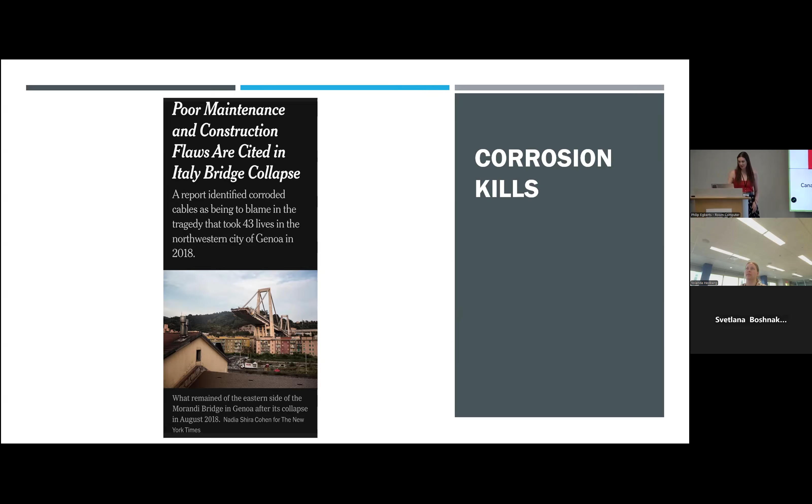So we know that there's a direct link between corrosion and safety, as so many of you have already pointed out this morning. We also know it costs a lot of money. This was also raised as well. And I really like the perspective you brought, where if we can save money from doing it properly, we can put that money elsewhere. So from a company perspective, an organization perspective, a government perspective, that's very helpful, actually. Maybe we could be putting it into healthcare or something.

Yeah, there's a cost to it, but it's also depreciating all the assets that you have. It does, yeah, exactly. And I think as well, we can get a pretty good handle on what the direct costs are, and in fact if you look in the impact study, it will talk about that. But there are also indirect costs associated with corrosion, which we found very difficult to measure, that are often at least an order of magnitude - the same order of magnitude as direct costs.

So direct costs are things like your materials or your replacement costs or something like that. The indirect costs are more - have you got environmental fines? Have you lost production? You just told us about an incident that shut everything down for 2 weeks. In mining, if you have a shutdown for 2 weeks, someone's getting fired somewhere. That's all I know.

So that's important. And then, of course, we've heard a lot of this as well across the group. We know corrosion pollutes. We've got pitting corrosion as a leading cause of pipeline leaks - so many examples of this. We recently had a client, a gold mine. They were using cyanide in their process, and there was a leak in the cyanide circuit. So immediately there's remediation, there's a lot of stuff that has to happen. They did a very good job of it, but it shouldn't have happened in the first place.

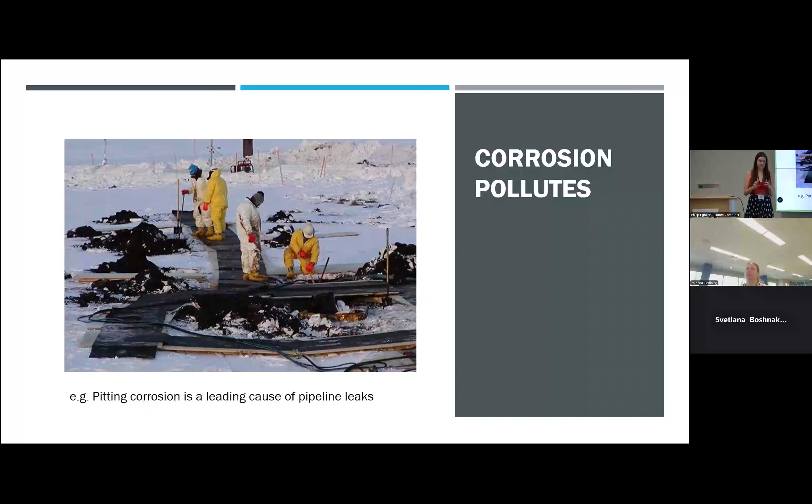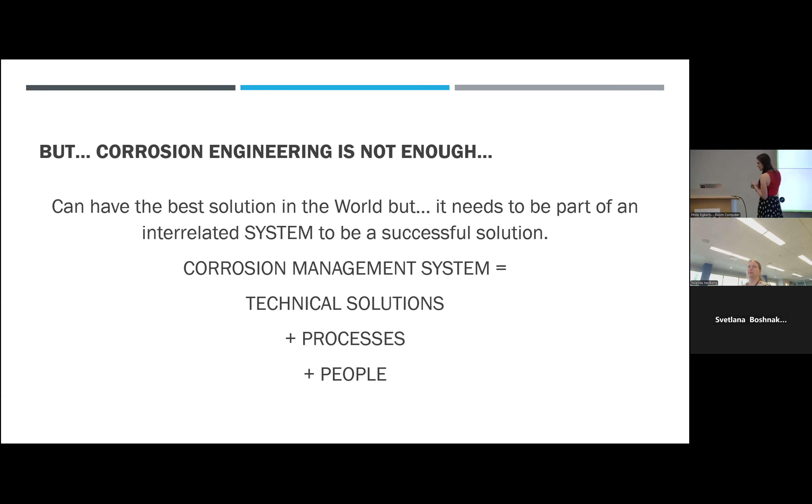So I think we all have a good understanding of why corrosion is important, but you're all in this course, studying away, and really focusing. I found I really focused when I was in school on the technical solutions - what are the right technical solutions? But it isn't enough to show up and solve the problem of corrosion with good technical solutions. We need to actually create corrosion risk management systems. The system is a combination of very good technical solutions, plus processes, plus people. So we're going to spend the rest of the day looking at some of these.

But just to drive it home a little bit, it's just a made-up example, but it was really just to show - imagine that you're on a project. Your client is in Indonesia, a big mine site in Indonesia. I have one in mind, but I won't say names.

They're having rapid deterioration of their coating on structural steel. You're going to come in and say, I have a great solution, I'm going to give you this specification for this amazing coating that will do all of these amazing things, it's going to be great. But the site team doesn't really have the skill set required for implementation of this specialized system. They don't really have a robust quality assurance, quality control process. What would happen if we only focus on just giving them the right solution?

Because they can't do it, right? So sometimes we have to always pay attention to what is the situation that we are putting this solution into. Do they have the processes? Do they have the training? Do they have the budget? All these different things are working together to make sure that we get the technical solution right.

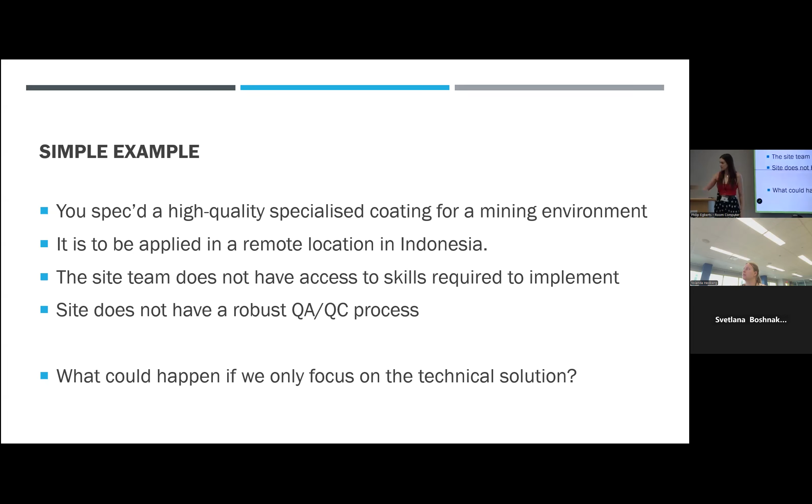If we just went in at the moment, and this is an actual client that we have right now, and say you should be using this coating, get it done, this is kind of what we would end up getting back. It would be comments around, oh, you over-engineered this. We can't even source this. There's something wrong with the system because we put it on and now it's falling off. It's the vendor problem, it's the manufacturer problem.

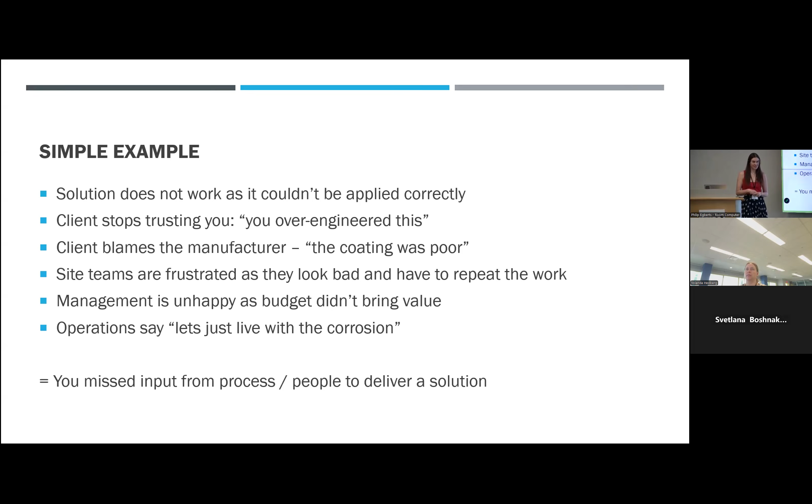We didn't get any value out of this. And then often you get people just giving up, right? So we've kind of missed really important input from a design perspective, from the process and the people side of things. We might have the best solution technically speaking, but if we can't implement it and get it to work because we've missed out this other information, there's no point doing it. We'd be better going with a bog standard epoxy and calling it a day. So we have to think about process and we have to think about people.

So we're going to kind of walk through this a little bit today. I'm not going to go into the corrosion engineering and the technical piece because you guys are already doing that. But we're going to start with how do we use this data in the best way to start making decisions. So we're going to look at corrosion risk assessment. Then we're going to get into, well, what are the processes and what's the structure and the framework that we should be using in order to create a corrosion risk management program. And then we're going to get into the human factors aspects.

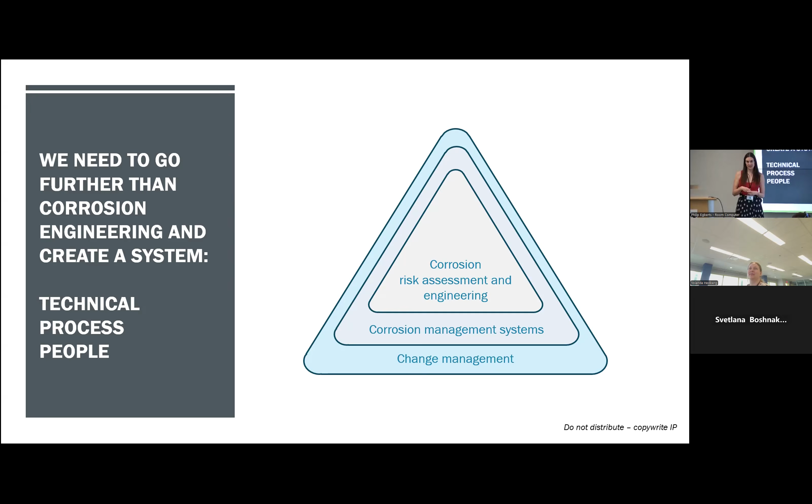I'm not a change management expert. I haven't done any training in change management. We've been working with professionals in this area for years, so I'm just going to share with you what I know. I just want you to understand I don't know everything. But if it's something that interests you, this is an area where I'm really focusing my learning right now, so if it does spark your interest, I have loads of references for you as well. So corrosion risk assessment - does anyone in the room have experience using a risk assessment approach?

Yeah? I read your book that you told me to read. You read the book? The expensive one, it was like $300. Yeah, that's excellent, so Phil's good. And you've had some experience as well? We'd have a lot of things rusting all over. Okay good, so this table's going to have a little head start maybe on other people. Anyone else? Mayday, you've used it as well, you've used it with us. That's good, she's already ahead. That's good, okay.

A risk assessment really is just another tool for you to help you with decision making. It's a very structured approach to looking at all of the risks. Yolanda will like this, you make risk registers. You really think about what are the defects that could occur and how you're going to control them, and assigning a numerical value to those risks so that you can prioritize and go through them in a systematic manner.

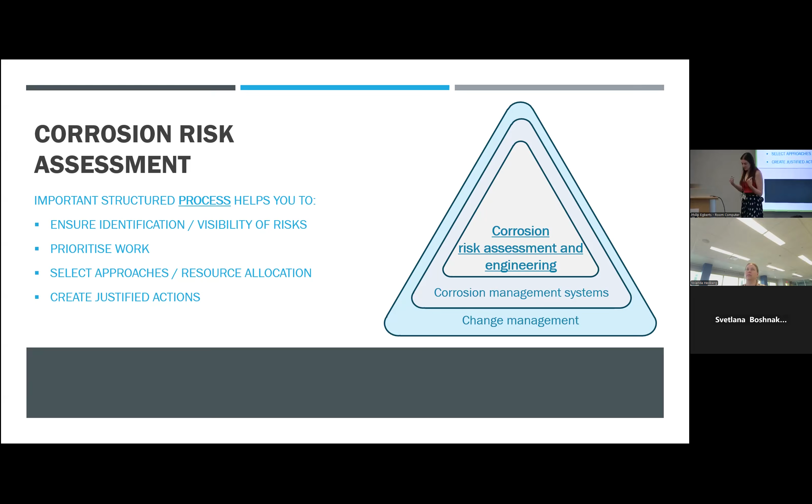So we use this as well to answer the question of what is the most important thing that we could be doing here with the resources that we have, whether those resources are people or budget - obviously a big one. But we need to be able to justify as corrosion engineers why we're recommending what we are recommending. So you could do everything, right? But we can't do that, it's not practical. So we have to focus ourselves and our resources, and this is a tool that helps us to do that.

So for those of you who've used these before, this is going to be very simple. We're just going to go through it at a very high level today. But risk is really just probability multiplied by consequence, right? So the likelihood of this defect occurring and what could happen, what's the impact of this if it fails in this way. So very, very simple.

So the probability is what's the rate of probability of an accident happening, on a scale of say 1 to 5, 1 being highly unlikely, 5 being almost certain. If it's me driving, probably not 1, slightly higher, but let's say 3 - there's a moderate chance of this occurring.

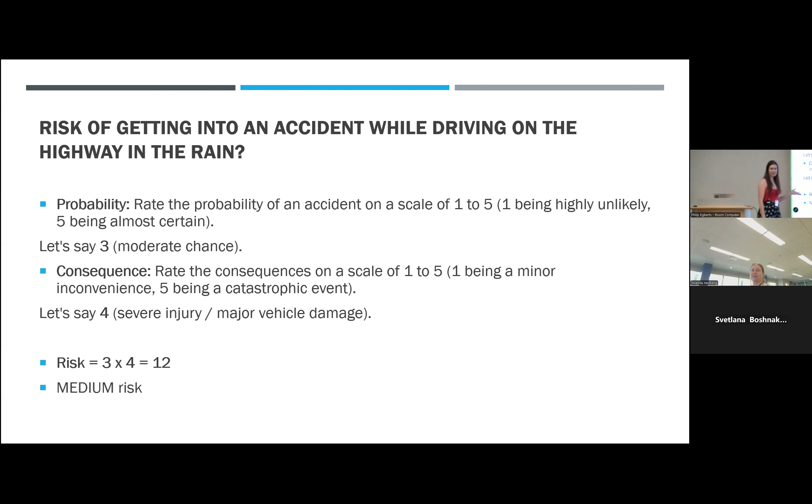So let's say we choose 4. It's very, very simple. So then you end up with the risk calculation being 3 times 4, which everyone could do. We're at a risk level of 12, which if you look at our matrix, we're sitting over here.

So often there needs to be a decision point when you're doing these risk assessments around what is the risk level that you can tolerate. In this case, we're talking about what's the risk that I can tolerate as the driver of that car.

Am I going to bother doing anything with this risk because it's here? Or is it only when it gets into this kind of red zone that I'm going to start really worrying about it? Organizations have formal risk sort of approaches that they use, and they will have their own tolerances.

So say this was a bridge - let's go back to our bridge example. We may have a client that says, okay, our risk tolerance is anything that's in the high zone must be addressed, this is non-negotiable. We're also going to add in anything in the medium risk sector that's 12 and above.

So you're starting to narrow down where your focus needs to be. You've got all of these defects in your bridge, you've assessed them all, and now you know which ones you're going to focus on because they're either high or medium high. Those are the ones that are going to get resourced because they're the most important ones that we need to do something about.

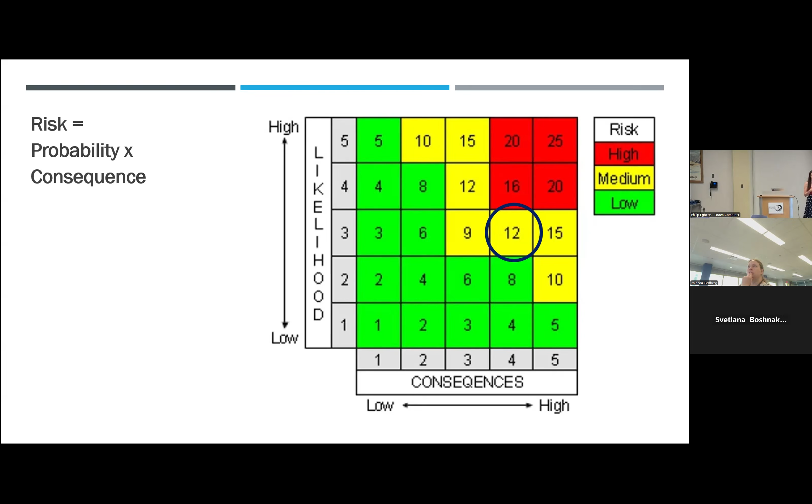And then maybe you're saying, okay, the ones that are 12 or 9 to 11, those are the risks that we are going to monitor more closely because they're a little bit on the cusp of our tolerance level. And the low ones, we're just going to routinely monitor. So you're starting to use your assessment to drive very targeted, focused actions - that's really the usefulness of this tool.

So the other nice thing about it, and Yolanda's going to be like, yes, is it forces you to actually sit down and think about what are all the possible things that could go hideously wrong here. What are the risks? What are the defects that could occur?

So if we go back to our bridge again, you are going to go through that bridge at a component level. So you might look at the deck, you might look at the abutment, whatever the major components are in that bridge, and you're going to say, what are all the things that could possibly go wrong? So you're thinking about de-icing salt attack, spalling, things falling off, cracking, loss of rebar section, potholes.

You're going to go through the entire list for every component in that asset, and you're going to assign each item a risk value, because then you can go, okay, we've done it for the whole bridge. We only have $2 million, so we're going to figure out those high risk actions and start to lower the risk profile of that asset.

So if we go back to our driving in the rain example, actually, maybe we won't do that right now. We'll do that in a minute.

The first thing is that it forces us to go through and really do an assessment on what are the risks that we're seeing here as corrosion engineers. Sometimes you're going to have to bring in our friends from other disciplines, which is where we get to make lots of friends. In this case, we'd bring in a structural engineer to look at our bridge. They're going to input structural risks that they're seeing. So it's a multidisciplinary approach.

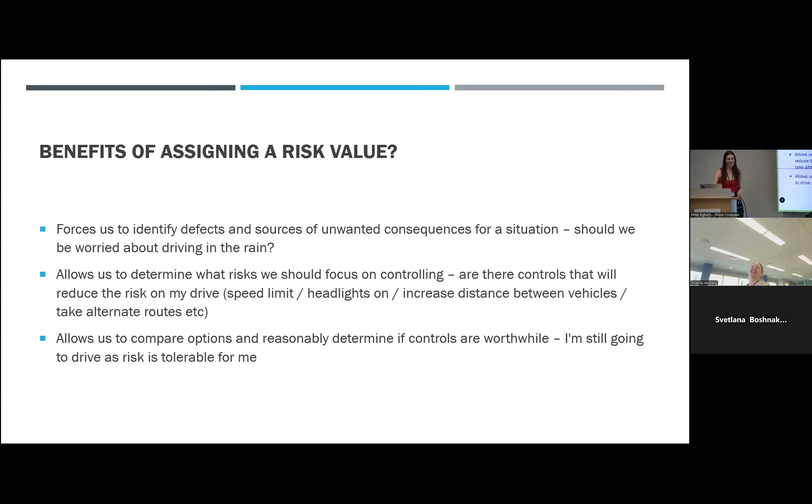What's that? Christmas lights all around the car. I'll put Christmas lights. Yeah, exactly.

So we've been through a very simple example with the car driving, but in reality these matrices - normally what happens is a corporation or organization will develop what risk means to them, and they'll create their own probability matrices. These are just some examples. I can't exactly remember where I pulled these from, but some people will look at likelihood 1, 2, 3, 4, 5 - saying the likelihood of this happening is rare to almost certain. The language changes, but the structure is usually very similar.

Or here's another one: it's going to happen at a frequency of less than 1 in 1,000 years. Seems quite low, right? So they've said improbable. And then all the way down to frequently, something that might occur once a year. So the probability matrix has to actually make sense from the perspective of what's happening at the asset level. Like if we're looking at assessing corrosion, this doesn't really make a lot of sense. So we have to be careful that the matrices we're using actually make sense and are at a granularity that's going to be useful for us.

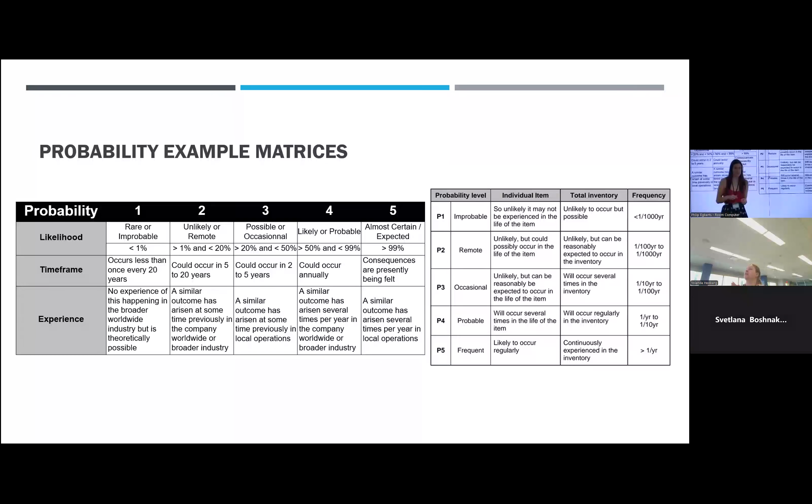Yeah, sector, because I can think - yeah, exactly. So you may have your stress corrosion crack growing at very small levels over 50 years. You still don't want that crack, right? That's still a massive risk for nuclear, but a crack like that in another piece of process equipment in mining, or for example in a replaceable pump, you don't care. So this is what I mean - you have to be a little bit careful with the way you assign probability. It has to make sense for what the context is.

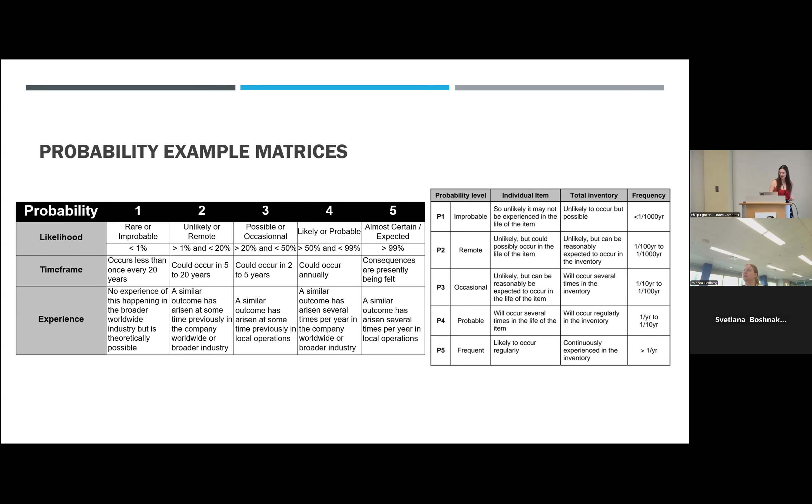But there are loads of these, and you can look at them and do some searching and you'll find lots. Consequence matrices - same warning.

The level of consequence has to match what we're doing in the context. They typically will look at health and safety, environment, and operation. Operation typically tends to link into finances in some way. So normally the organization will have its standard consequence matrix. Often they have it at a corporate level, and you have to bring it down and adjust it to the levels we need for corrosion.

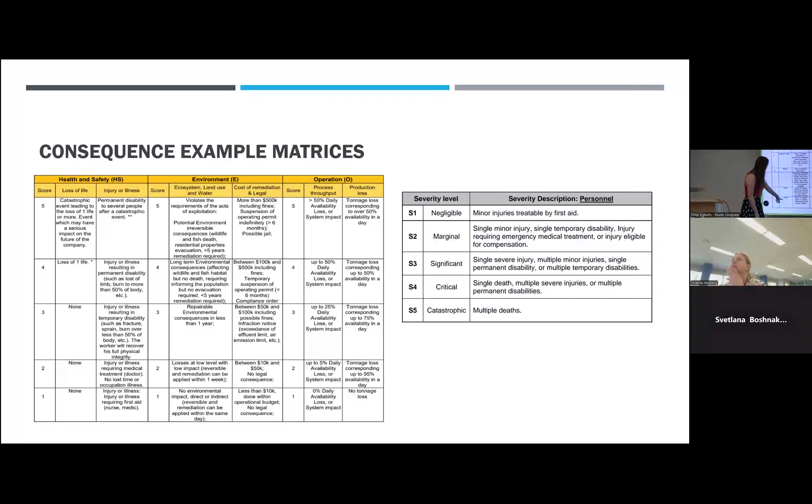Here we can see we're going the other way now. Down here, there's no health and safety consequence of this action happening, so we're going to assign it a 1. However, we've got a 5, which is a catastrophic event leading to the loss of a life or more. So you're sort of having to assess things on this scale.

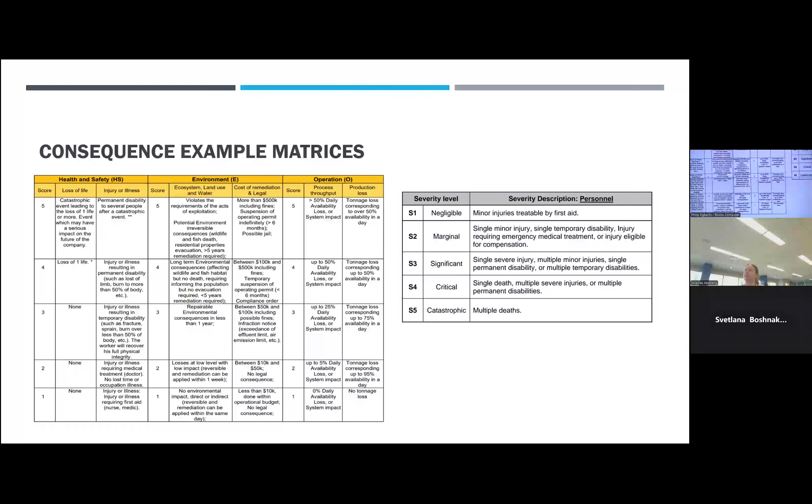Here's another one, they've called it personnel, but it's really health and safety again, similar kind of scale. So these matrices usually come from the organization. Normally when we say, hey, we need your risk matrices, I'd say 95% of companies already have something they're using at the corporate level. As corrosion engineers, we take those and ask, does this make sense? Are these levels correct for the context we need to use? If they're not, we have to make adjustments. But it's at least a starting point.

So when we think about doing a corrosion risk assessment, yes, we've just jumped in and started talking about assigning probability and consequence ratings, but there's actually a process involved that gives you the whole stream of how we approach this when we get into doing these for an asset.

First of all, we're selecting what is going into this risk assessment. Not everything needs to go into a risk assessment, not everything is really that important. Do we need to look at this tiny valve on that pipe that doesn't matter? No, it's not a good use of our time. However, do we want to look at the deck of this bridge? Yeah, probably—we've decided it's critical.

And there are ways to formally do that criticality assessment. Normally companies will also do this—they'll do the criticality assessment, which components, which assets are critical for the operational health of the organization. Those are the ones that end up in this stream requiring a risk assessment.

We're then going to collect design and condition data. So we're looking at what is the material, did they include a corrosion allowance, what's the coating system, what are the process operational requirements—temperature, pressure, flow rates?

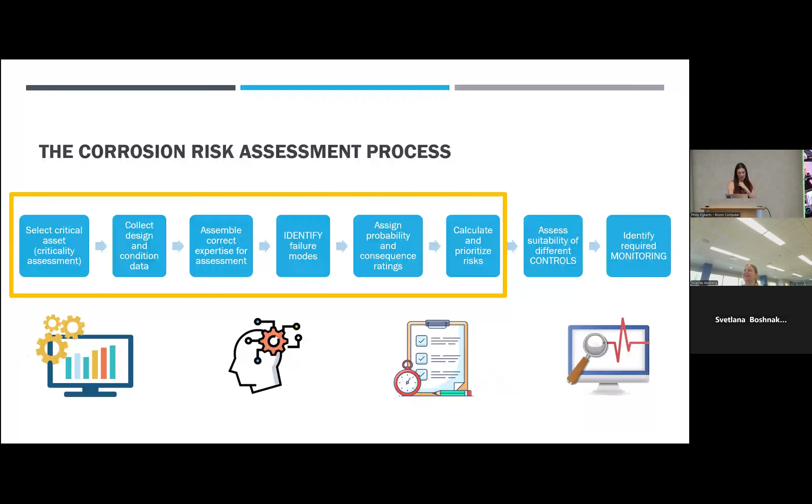So what we're going to do now, I'm going to stop speaking because that was lots of words. We're going to actually get you guys to work through this a little bit with me. So you are a corrosion engineer at this site. Where do you start? You've been told to do a corrosion risk assessment. Someone in leadership decided it was a good idea. Where do you start?

I like those rusty things down there. Yeah, what's the first thing that you do? What's the first question that you're going to ask?

If there's any failure or leakages, that can actually be a really good place to start, because it tells you what's urgent, what you really need to look at and get on top of. Figure out what they're actually handling in operations. There's a step for that too.

Where do you start? That's also another piece, right? But if you're looking at this, you can see immediately that there's a gargantuan amount of things in that picture. You have to go to your criticality analysis. What are we actually including in this risk assessment? All of it? Probably not.

You probably want to pull in - I'm standing too close to it now - but we've got some, I think these might be CIL tanks over here. They're very important. We've got a thickener maybe over here. We're going to go in and figure out, from a business operation perspective, what are the most important assets that we need to keep operating. That's going to be the first question, because that tells you these are the things that are on the list, these are the things that we're going to focus on.

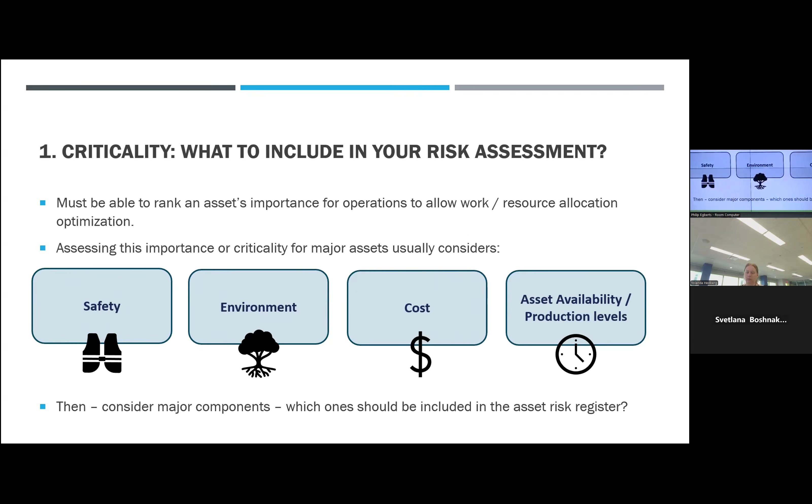And then we have to collect information. So this is like our collecting blueprint information. Not only are you collecting information on your materials of construction, specifications, design, all of that stuff - your most recent condition data is very helpful - but you're going to start asking questions around, from a corrosion perspective, what are the factors that are influencing corrosion, so that we can figure out what our defects are. And it always goes beyond material selection.

I always like to throw this up because we often forget, when we're asking these questions, there are all these things that can impact corrosion. Obviously your material selection, but then you've got your environment.

Environment is important. If you're working on a design project, something that hasn't been built yet, it's important to consider not just the normal operating conditions that asset is seeing, but also thinking about what are the outliers, what things could fluctuate.

We do a lot of work with mining clients, and the process exposure conditions can vary quite a lot, particularly in the chemical sense, because the ore concentration and the ore chemistry changes just with digging in a different bit of the ground. So you have to think about that.

What are the normal operating conditions, and what are those outliers going to look like? It's not that your components may only be seeing service. They may be seeing transportation. They may be thrown in a field during construction for a year and just left there in the rain. So you have to think about the full range of service conditions you need to look at.

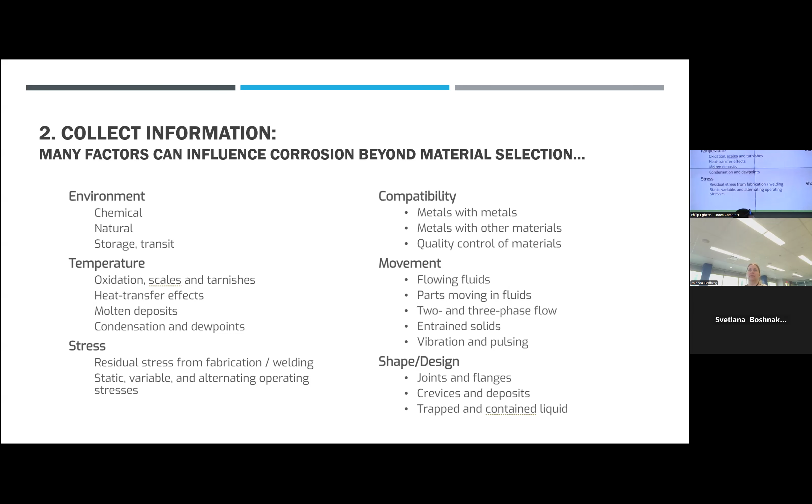So collecting the information is just such a core part of what we do. If you don't have a broad view on collecting the information, you're going to come up with the wrong answers. And then we've been through this, who else do you need in the room? This is where we make friends.

That Jansen project I was just describing, we actually de-risked it from a corrosion perspective across every single component and asset that they had. So we were working with the structural engineers on the concrete and steel, mechanical engineers, the process engineers, like all of them, even down to the architectural group. This is one of the nicest things about corrosion, because we connect everybody else and we make friends.

So other disciplines here. And then the other thing, if you've got an asset that's already in operation, it's super useful to pull in your operators, because they will have the operational background, they will know what's going on. You can bring in your maintenance teams, your reliability teams from site. They will give you invaluable information, not just what you're seeing in the inspection reports, but how it's operating on a day-to-day basis.

Operations are also fun because sometimes they'll just do things that keep it working. Yeah, they're like just hitting it with a wrench or something. Yeah, it's not documented. They don't follow management of change processes for engineering changes and things like that.

So that can be very, very important. We often also bring in vendors, so if it's a specialized piece of equipment. We did this recently for a filter press for a gold mine as well. We didn't know how a filter press really works, so we pulled in the vendors and had them give us information around what is normal operation, and what defects they see come up with their own equipment. So you're pulling in information not just from documentation, but also from different skill sets.

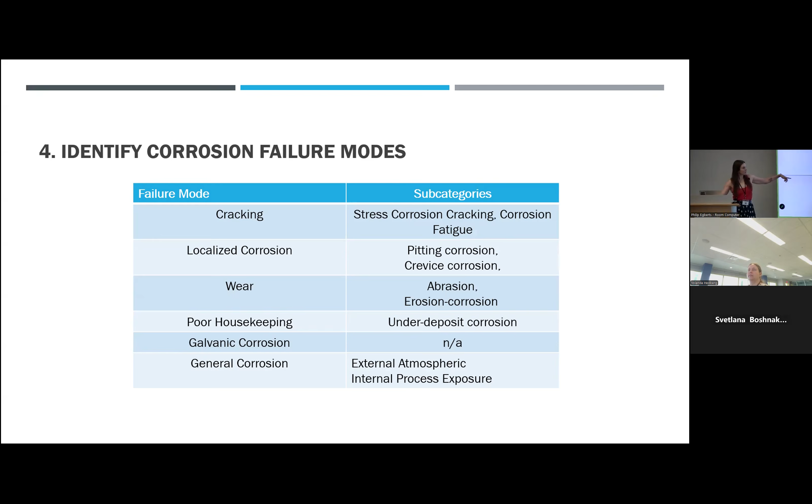Then you're going to identify your corrosion failure modes. So in your risk assessment - I'll show you an example in a bit - you've got to have one line item, one assessment done for each type of defect. So if for this component there's going to be general corrosion, pitting corrosion, and possibly some stress corrosion, you've got 3 defects that have to be independently assessed. But you can't figure out how it's going to fail if you don't have all the background information.

Okay, I've put in an example here. Good for me. So you have a stainless steel pipe carrying process water to a critical circuit. What might you want to know? This is around asking the right questions, training yourself to ask the right questions.

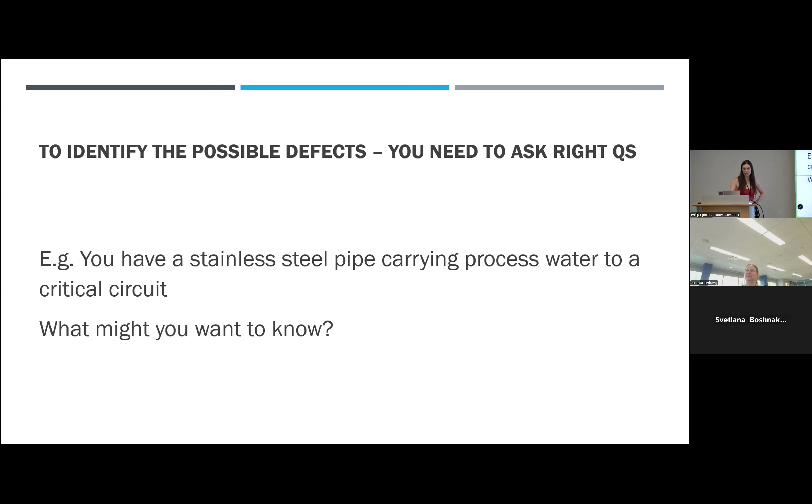Chemical environment - pH, temperature. Concentration of your chlorides, other impurities, all that kind of stuff. What's the pressure? Good. You might also want to ask what grade of stainless steel. In this room we know there's a difference between 304 and 316 - we know they have inherently different corrosion resistance. Some people don't realize this and think, oh, it's stainless steel, we'll just use stainless steel, and they specify it without actually understanding the limitations of the different grades. So you might want to ask that too. You're looking to figure out all of these things.

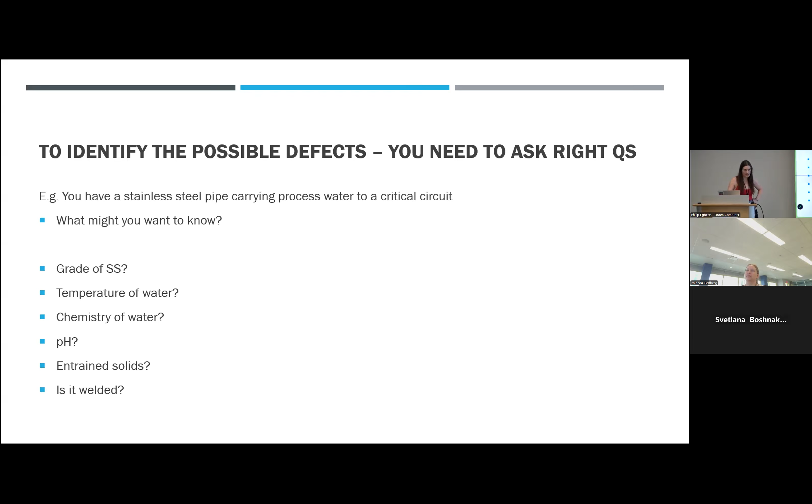So it's about asking the right questions. And we already know why we're pulling in this data. We're trying to figure out - you mentioned chlorides, right? So you're going to figure out your grade of stainless steel, your chlorides, the temperature. Why? SCC, right? So we're trying to ask what seem like very basic questions sometimes, but they're very important to ask.

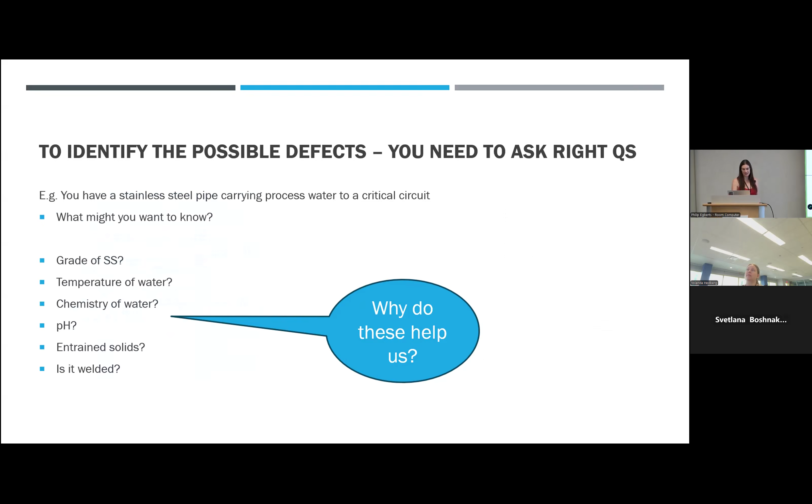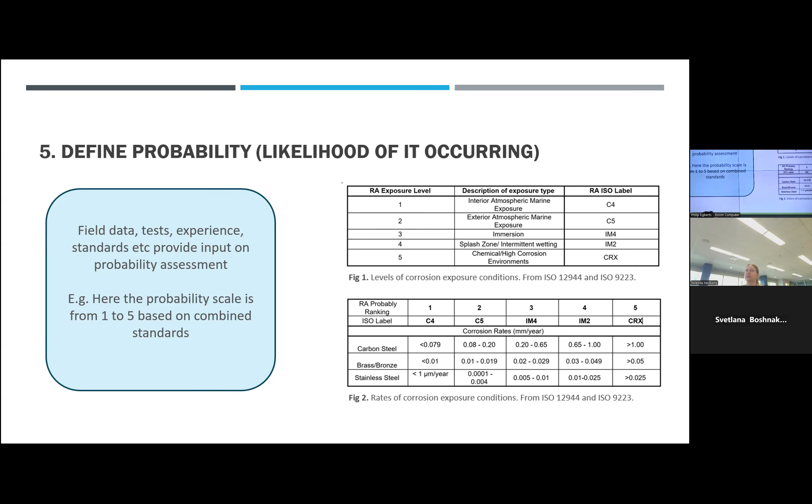Then we're going to define the likelihood of it occurring. I showed you those general probability assessment tables before - these are a couple we've used for our projects. You might have come across these already, but we're sometimes using existing standards to help define the probability. You've got some of your C1 to C5, CX in here, and we've got immersion categories. Using the standards can be a really good way of assigning a justifiable probability ranking to something. It doesn't always work - obviously the best is to have corrosion data from the field, but often you won't have it, so you have to come up with a different way of doing it.

Okay, going back to our stainless steel pipe. Did we change it? So if you're thinking about chloride pitting in that stainless steel pipe, what would happen to the probability of that defect occurring if you had carbon steel versus stainless steel for pitting? Depends on the pH. So you have to, when you make any changes to that system, reassess the risk, because the corrosion risk for pitting for carbon steel is going to be different from stainless steel.

What happens to the probability if you add an external coating? Slight trick question - external meaning the outside of the pipe. Is there only atmosphere outside, or is it something else? Exactly. So when you're assessing risk on that pipe, everyone immediately goes to what's inside - the chlorides, the temperature - but you've also got another corrosion circuit for that asset on the outside. So is it just atmospheric, or is it in a wet process in a potash facility where it's corroding really fast? So you have to be a little bit careful with these.

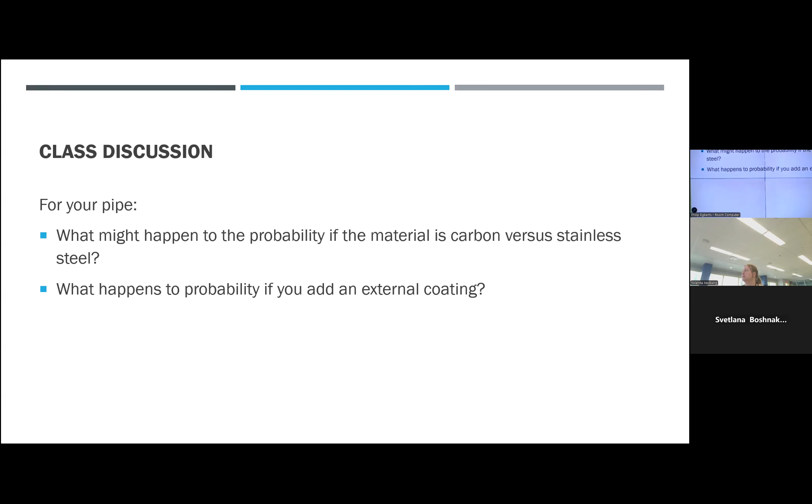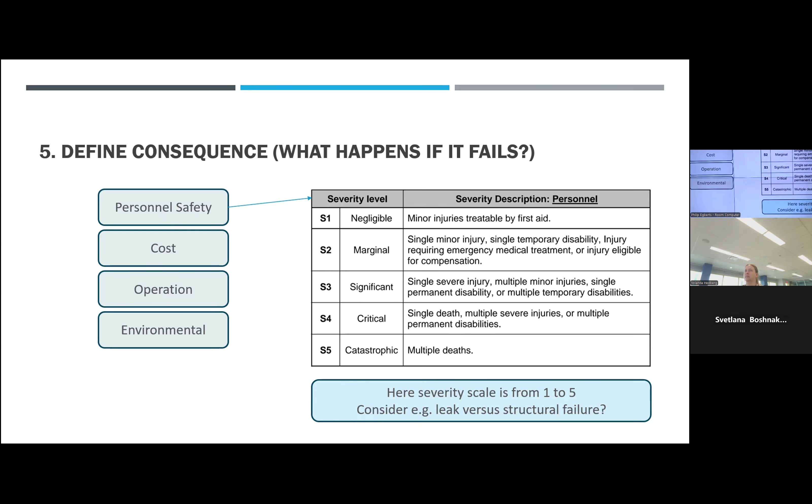Okay, and then we've got our consequence scale. I'm not sure I need to go through this in more detail, but the next step in the process is assessing what happens if it fails. So going back to our pipe example, is the pit going to be a nucleation point for cracking and the whole thing bursts open, or are we going to end up with a leak? Those have different consequences.

What happens to your carbon steel pipe? What happens if it's a localized form of attack versus a general sort of attack? What might happen to the consequence level? The pipe would more easily explode, right? Or it depends on a lot of things. But generally, general corrosion is your friend, because it's easier to predict, easier to measure, easier to inspect and monitor. Localized corrosion isn't, so your consequence might be impacted by that.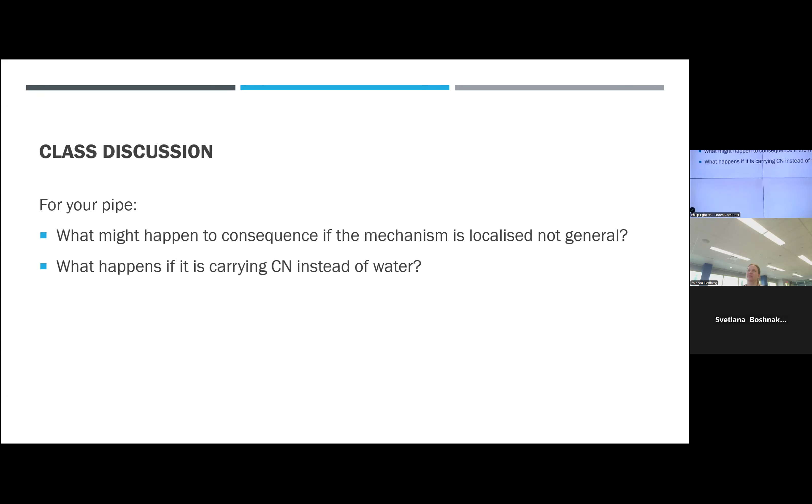And what happens if it's carrying cyanide instead of water? What happens to your consequence then? So again, we're just playing with it and saying you have to be very careful when any changes happen.

And then you carry out the risk calculation. Sometimes it's as simple as doing a multiplication. Some organizations use that. Others, because you're doing this assessment for consequence within safety, within cost, within environment, have different categories of risk. And then so what? Sometimes you'll see people adding them up to give a final risk value that includes all of those. Sometimes they'll just take the maximum, the consequence that came out highest. Some organizations say health and safety is much more important than environment, so they'll weight those rankings and then add them up. So there are different ways of doing it depending on the context.

But you need to figure that out, and it needs to be standardized, and everyone needs to be using it. You can't have one part of the organization doing their corrosion risk assessment one way and another doing it another way — it needs to be standardized. You also have to think about where the cutoff is. So like with driving a car, where's my cutoff for what risk is tolerable for this organization? It varies quite a lot — some organizations say just do the high ones, others say medium and high, let's make sure we're going through all of these as well. So it very much depends on the risk tolerance of the organization.

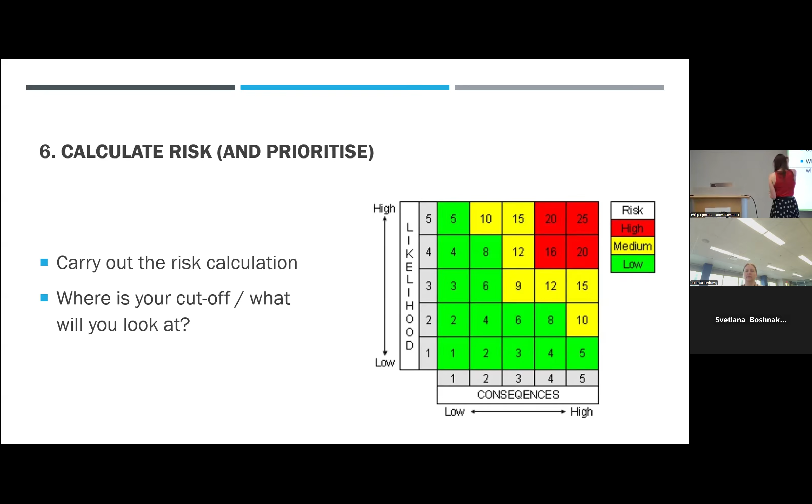Okay, so now you're going to do some work. You're actually going to carry out a risk assessment yourselves. I think we've got the handouts here too. Just do it by table maybe.

All right, so we're going to take about 15 minutes to let you guys figure this out. You have to go through the case study that I've given you. I want you to have a discussion around the table using your slightly different backgrounds, and come up with an assessment for the consequence and probability for the scenario and assign your risk value. At the end of the 15 minutes, I want you to tell me why you selected the risk value you did — what's your justification behind it. Also be very careful about noting down the assumptions you're making in the discussion.

So we are going to assess the corrosion risk for the hull structure in the bilge space of a naval vessel. We've decided already that this is a critical asset, that's why it's been included in your risk assessment. I've given you, hopefully on that sheet, the probability matrix and the consequence matrix. And I want you to assess only for safety, just to keep it simple.

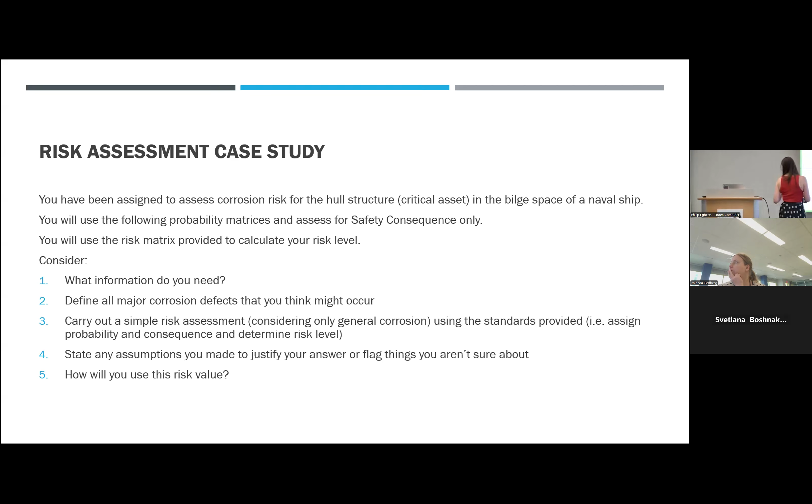All right, so I'll give you guys these are the probability and consequence matrices that I want you to use, and we're just going to use the very simple calculation at the bottom. I'm going to wander around, and if you've got questions that you want to ask me, you can do that as well.

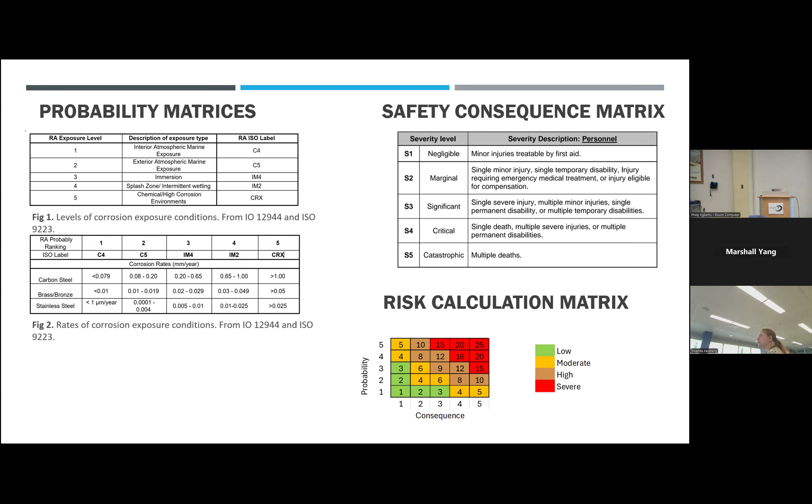Usually it was set in the range, which is carbon steel, and it would again be IM like 4, and the probability would be 3. We were thinking it would be critical if we think about the failure, general corrosion failure of it. It would be like sinking of the ship or anything like that. So it would be highly critical. Then our risk calculation would be around 12.

Okay, excellent. Marshall wants to say something as well. Online? Oh, go ahead, Marshall. Yeah, let me unmute myself.

First I googled what that English word means, and then I found out it's outside of the ballast tank. Because the first thing I was thinking about, the bottom of the ship was outside, but this is inside, so we're not talking about anti-fouling, right?

And as far as I can remember, the material should be carbon steel, 8mm thickness, usually, right? Welded together, because when they were built, they were welded, built in sections. And the coating system should be, I guess, this is an assumption, it's 60 microns, 2 coats. So altogether, there may be 120 microns epoxy. And also it's inside, so UV degradation shouldn't be a problem. But over time, there is mechanical damage, and also every coating is defective.

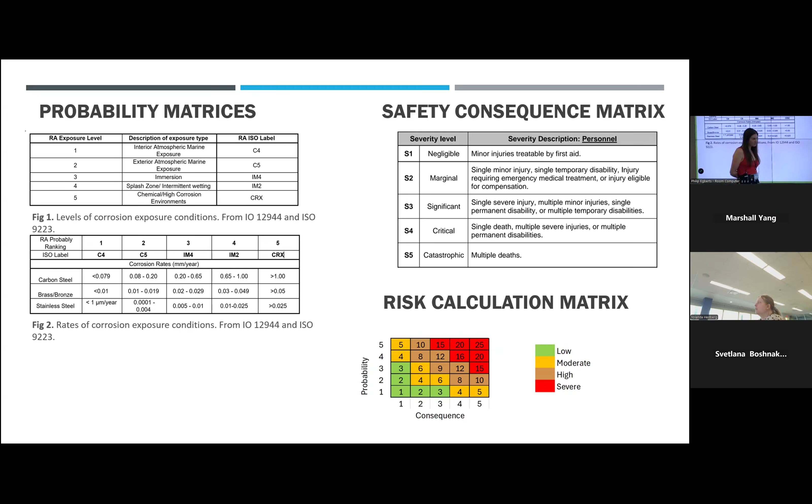There is coating delamination. But the water shouldn't be salt water because those are inside the ballast tank, but this is inside the ship. So it's generally clean water with some dirt, oil.

I'm going to stop you there, Marshall. So just to correct that assumption, so that there should have been some more questions, I think, in the room around this generally. I think people are making some assumptions about what's in the bilge, right? It can be seawater. Your ship could be sailing through fresh water. It could be sailing through brackish water. They also use it as a dumping ground for other chemicals on board. So there could be any kinds of things in there, and the composition varies over time. The immersion level varies over time.

Great, thank you. So that was an important question, I think. I think this table in the middle kind of had that question around what's it sailing through. So you almost got there, but there was another question on top of that. Is that all that's ending up in the bilge? You made that decision.

Yeah. Yeah, it is the bottom of the ship. And if you ever on a ship or around a ship, it's always wet. But there are other things going in it, not just salt water. It could be oil, it could be other reagents.

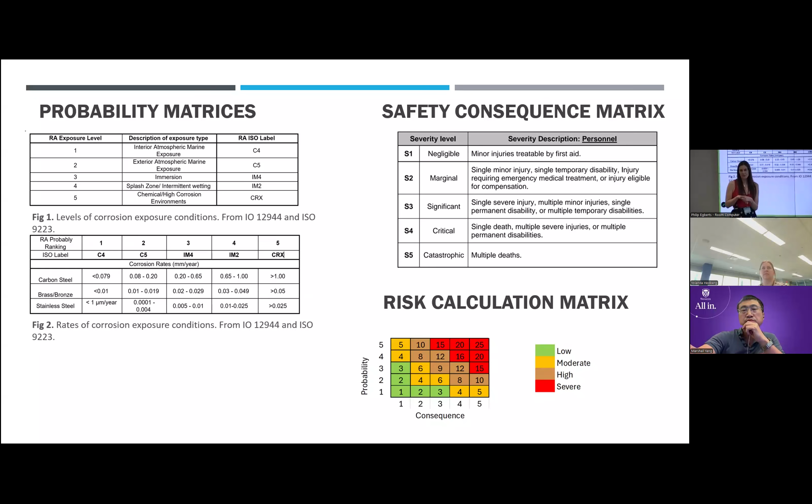Yeah, okay, so I've actually got some slides on this exercise, and then we'll stop for a break. How good were your questions?

I hope that this exercise has shown you that the level of questioning that you need to do to start these risk assessments is large. You need a lot of different people in that room. You need a lot of different sources of information. It's always a very good question to start off with: what is it? Right? If you don't know what it is, you don't know, you can't go any further, right? What is it? What is in the bilge space? What's it made of?

Is it coated or protected in some way? Are there biocides? Are there coatings? Are there cathodic protection systems in there? What's the current condition of it?

What are the likely failure modes? It's a bit like CSI - you're like a forensic person, trying to ask all of these questions to figure out the most likely scenarios. So with any corrosion engineering project, the quality of your questions will determine the quality of your solution. It's really important that everyone thinks at the beginning of any project: am I asking the right questions?

If you'd asked your person in the room who knew what a bilge space was and has been working in these bilge spaces for years - me - I was here as a resource, but nobody actually asked me a question. I could have told you what a bilge space is and what's in it. Everyone figured out how important it was because we need the water on the outside of the ship.

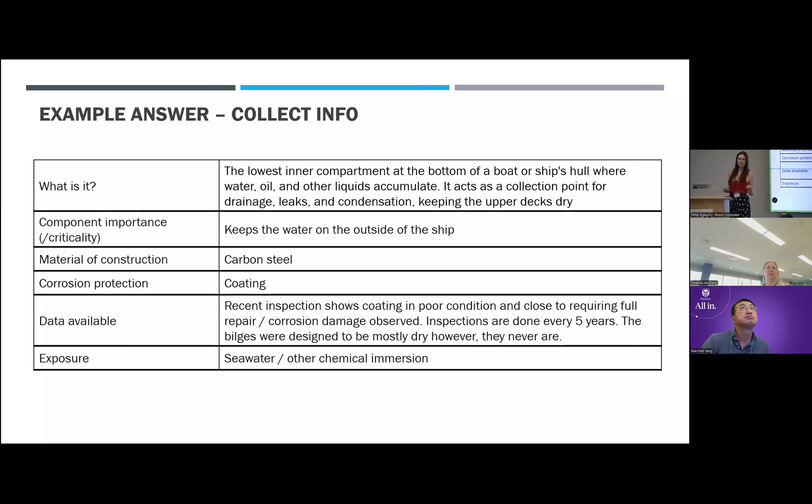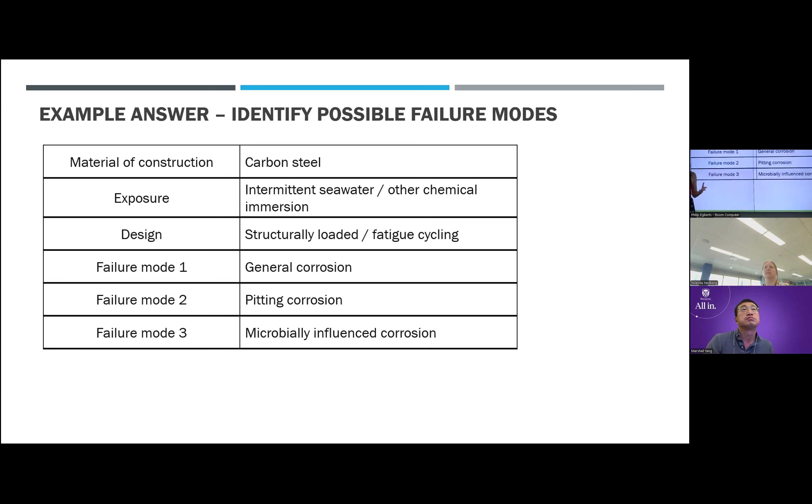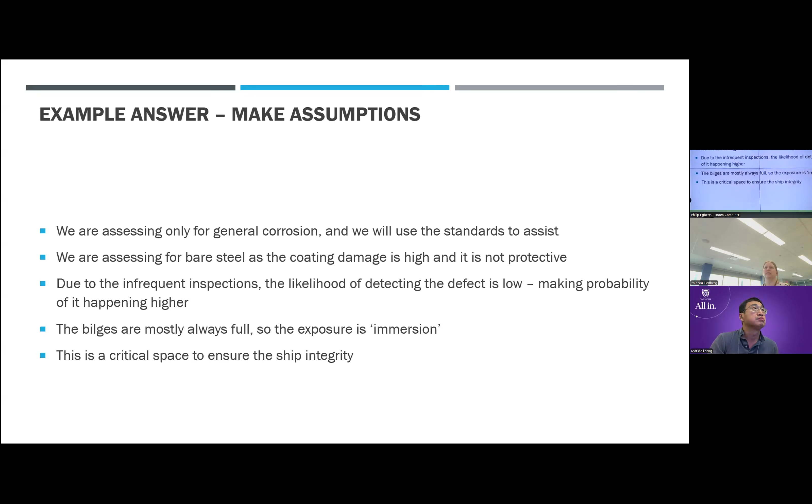We came up with some good assessment on the types of defects that might be present, some information on our assumptions around exposure. Obviously the hull, since it's a structural component, there are going to be stresses involved. So I think you were good about putting down the assumptions you made, but because your questions weren't always the right questions, you made some assumptions where you should have been asking questions. Just watch for that.

We've got agreement in the room that there's a risk level of 12, and then a 15 in the middle group. This is really supposed to be the first time you go through a risk assessment like this - you come up with your numbers, and then the intent is to use that as a discussion point with the experts in the room so you can agree and justify the selection you've made. That's where you start to really get input from all the different people.

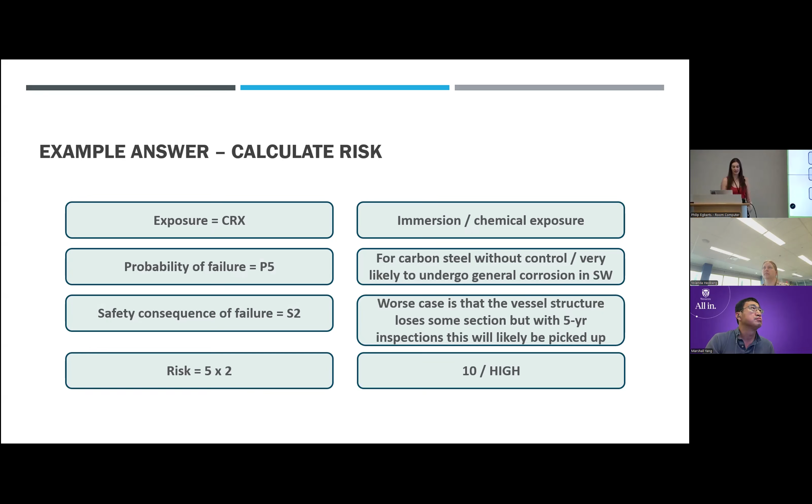Okay, no one's answered this question yet: how do you want to use this information now? You've got a 12 and a 15 risk rating - what's the next step? That would come to the mitigation strategy, or monitoring strategy, that we want to consider.

If everyone's in agreement it's a 12 in these groups after your discussions - ignoring all the assumptions for the moment - you might be doing something a little different from the folks in the middle who've decided this is a much higher risk. We're going to get the hull surveyors in on a more frequent basis because we know X, Y, and Z, and we think the risk is higher. Then it gets complex.

So you're using the data, so this is why your risk value has to be really well justified and really well understood, and you've pulled in all of that experience so that you can make good decisions on what's the next step. There's no point doing these and leaving them in a spreadsheet. You've got to actually use them to push actions, to implement actions.

So the first thing I like about these risk assessments is that you know what the risk is. It's visible now. You have a tool to start communicating that risk with everybody else. Leadership comes up to you and says, you've requested this budget, why? You're able to say, following the organizational risk tolerance profile, we've assessed this in a structured way, and this is the value we're getting, and these are our high impact actions that you don't want on your books because they're above tolerance. That's a very different conversation from saying, well, I'm a corrosion engineer and I think you should do this and it would be good. You're talking to a different audience, you've got a tool.

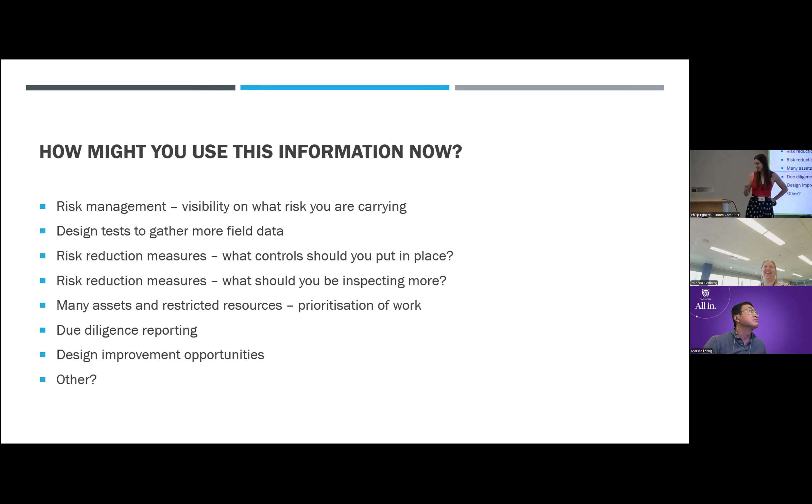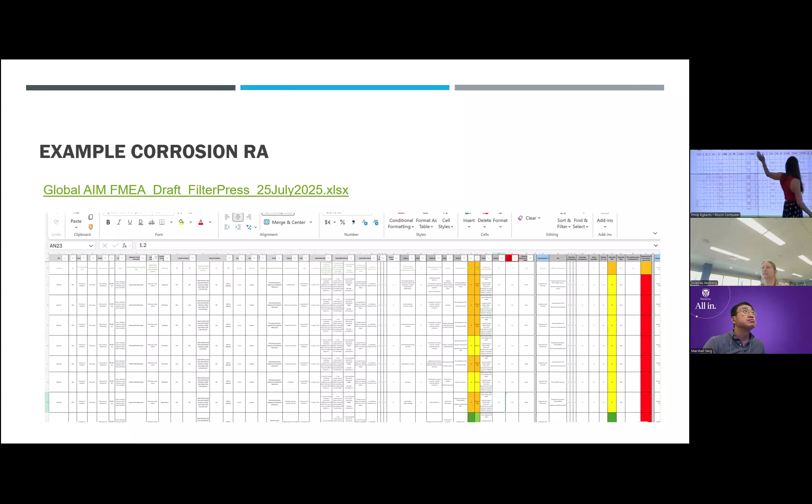Not to frighten you, I know we just did a very simple example, but here's one I made earlier. These things get quite complicated and there's a lot of information in them. I don't know if I can actually show you it, but maybe you can kind of see anyway - there's just lots of steps. You're having to think about a lot of different things, and this is where making sure you've got the data to answer the questions comes in. So you always do a risk assessment, figuring out all the defects - line by line, there's a defect. You assess every defect, come up with an initial risk ranking, and put controls in place. So these things can get very complicated. We just did one for a Navy frigate vessel, and we had 16,000 line items, which we then decided we should probably not have in Excel. So now we have an app for it. They can be complicated, or they can be simple, depending on the way you structure the program.